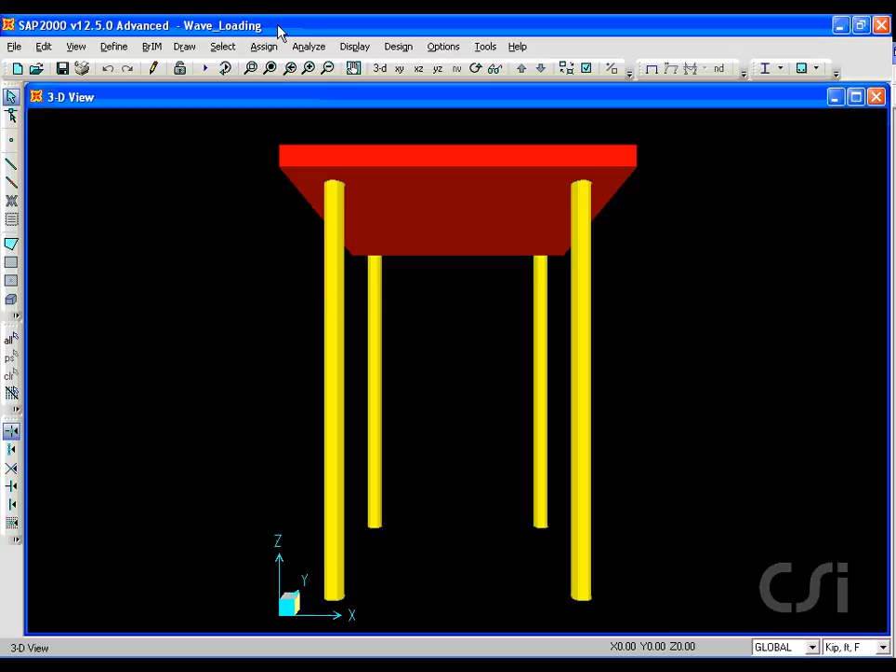This brief tutorial will show the tools that are available for generating wave loadings within SAP 2000. For this example, we will assume that we wish to generate wave loadings on a structure that is submerged in 60 feet of water. The velocities and accelerations calculated in the fluid will be resolved into drag and inertial forces that will ultimately be applied as varying distributed loads on the members.

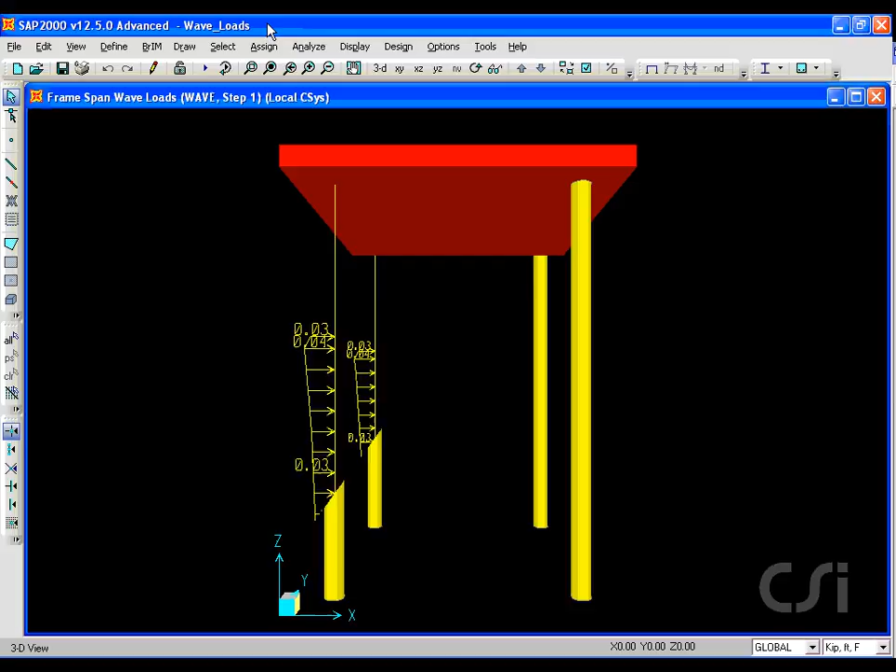The definition of the wave loads is handled through the Define Load Patterns option. We will define a new load pattern named wave with a type of wave, and with the automated lateral load based on the API specifications.

Next, we select the wave case and go to the Modify Lateral Load Pattern. Here we specify the wave load parameters, such as the wave characteristics, current profile, marine growth, which affects the width of the members, drag and inertia coefficients, which when used with velocities and accelerations generate forces on the members, and wind load, which can apply wind loads to the non-submerged portion of the structure.

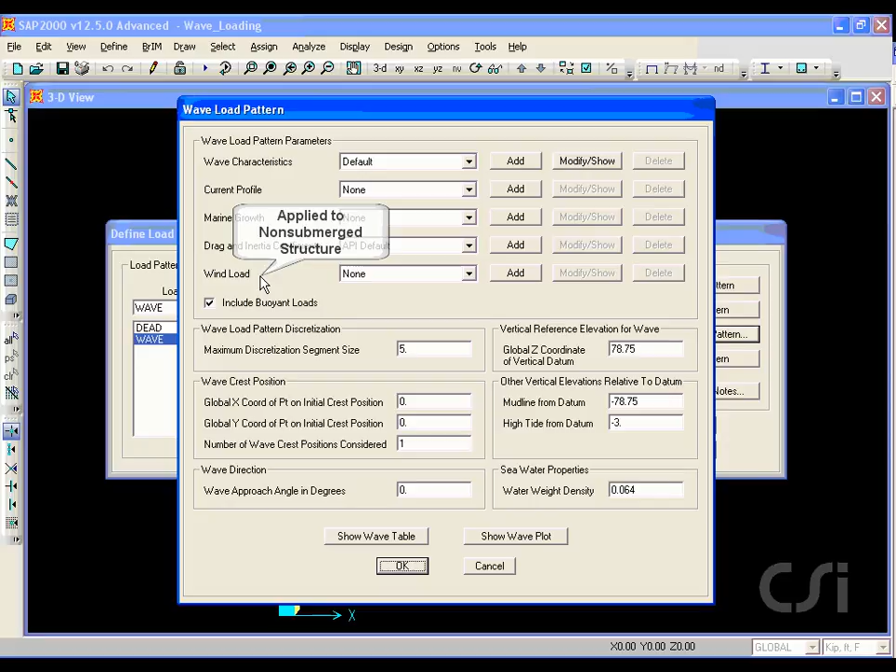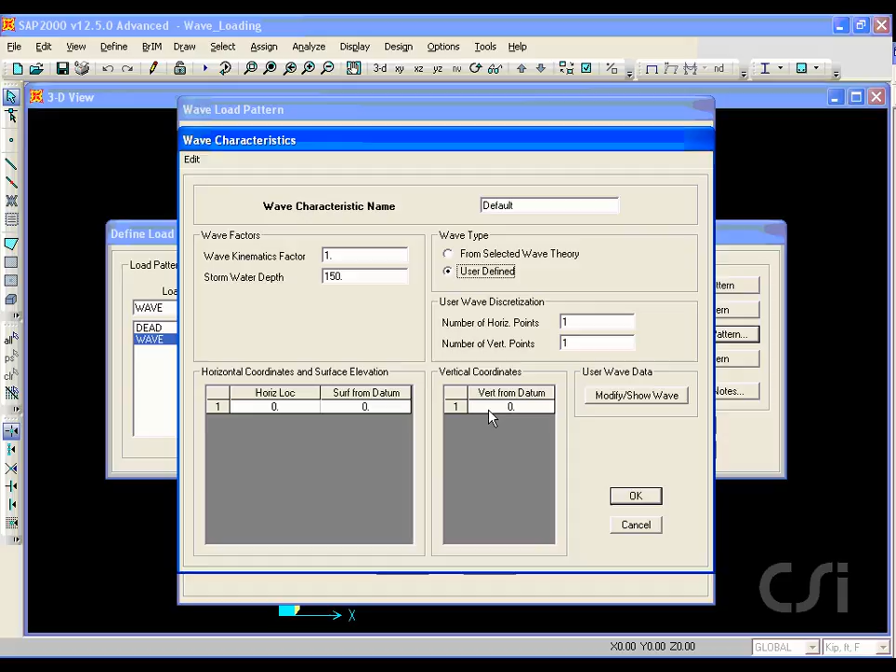Click on the Modify/Show button for the characteristics, and we see that under the wave type we have two options, wave theory or user-defined. If user-defined is selected, the user creates a table of wave points. For this example, we select wave theory and will generate a wave using the Airy wave theory.

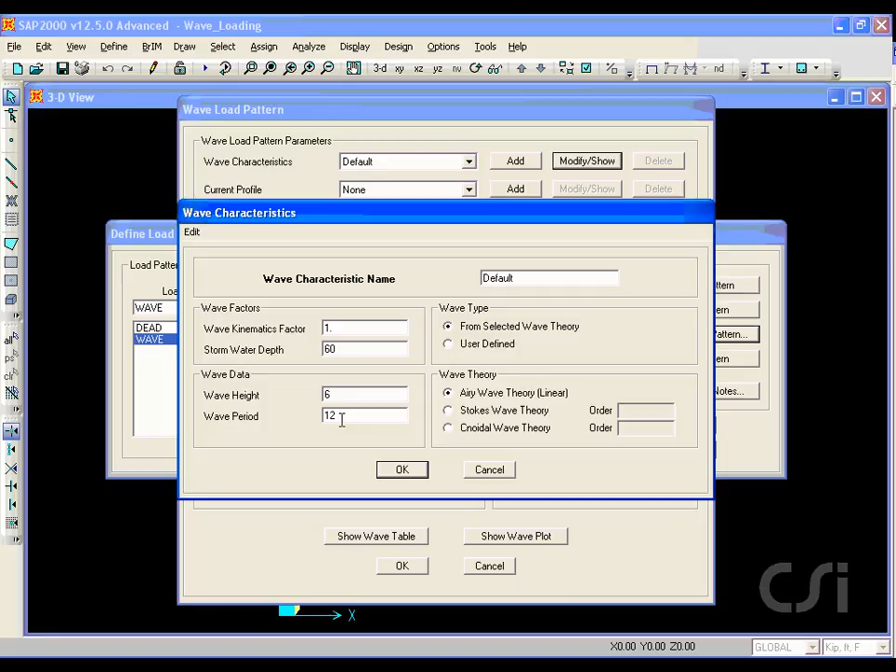We will leave the wave kinematics factor, which accounts for direction spreading, set to 1, but we'll set the storm water depth to 60 feet. The wave height will be set to 6 feet and the period left at 12 seconds. Click OK, and we can finish the data input by reviewing the position and direction of the wave, including the approach angle. For this model, we will consider only one wave crest.

In this case, under the vertical elevations, the datum should be a positive 60 feet, and the mudline will be minus 60 feet below the datum. We will set the high tide to be 0 from datum. We can view the wave by clicking on the Show Wave Plot button. Note that the program has calculated the wavelength from the input data.

On the plot, we have a number of items that may be displayed. The Click for Values option allows us to click anywhere on the plot to obtain the coordinates, as well as the velocities, the accelerations, and the pressure. The Contours option displays the velocity, acceleration, and pressure contours.

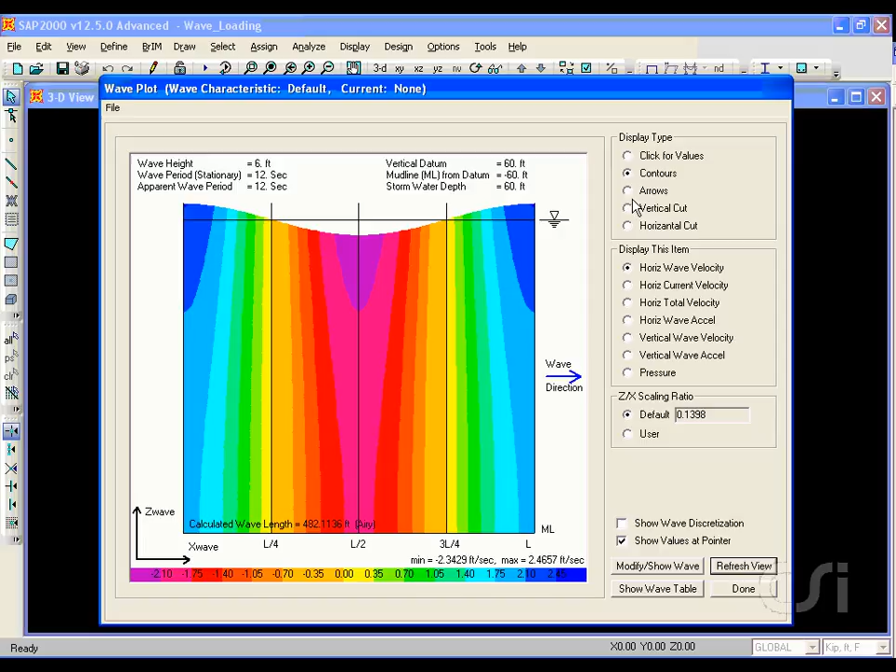The arrow selection displays the resultant velocities and accelerations, while the vertical and horizontal cuts will draw a diagram of the selected item at any location on the plot.

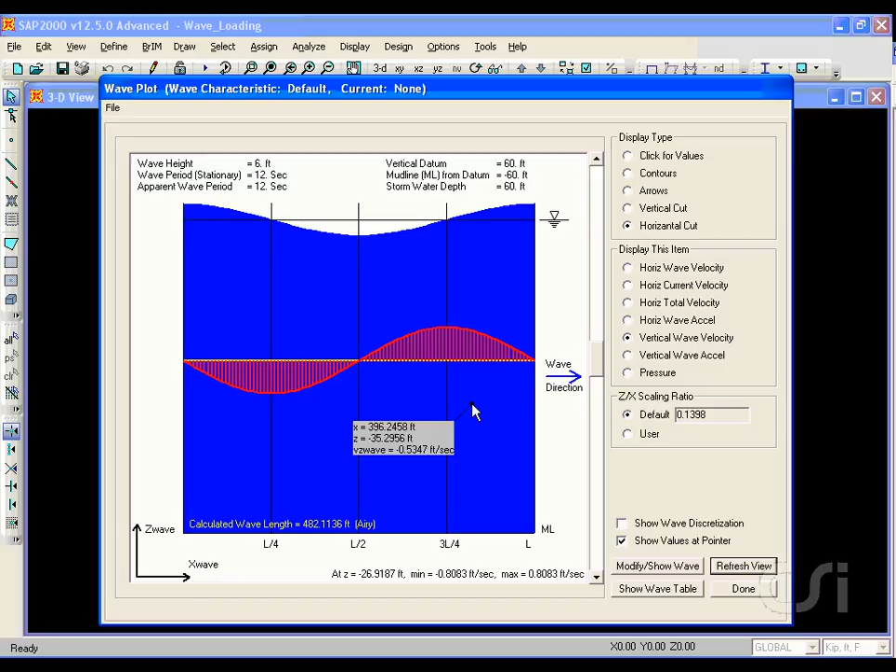If the Show Values at Pointer option is checked, the cursor will continuously display the coordinates and the value of the selected item, which in this case is vertical velocity. A click on the Done and then the OK buttons completes the wave loading pattern for this example.

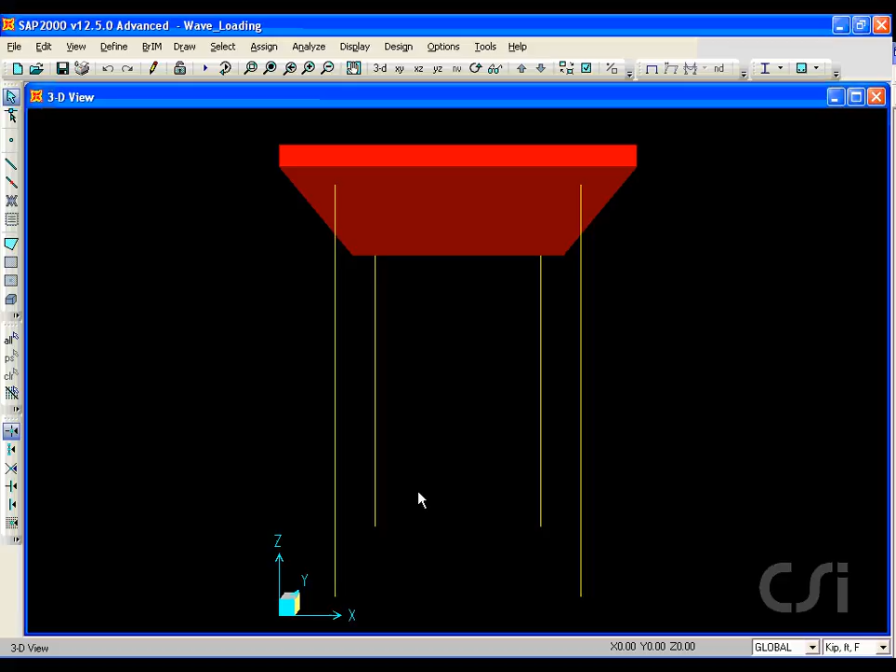Going to the Display Show Load Assigns command, and selecting the wave load pattern, shows that the wave loads have been applied. This concludes this tutorial.